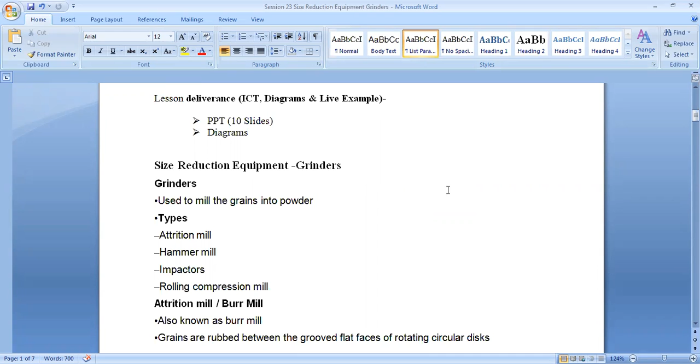Today's topic is the size reduction equipment: grinders. There are three, four types of grinders which are popular in the food industries: attrition mill, hammer mill, impactors, and rolling compression mills. Attrition mill is also known as burr mill, and it acts on the principle of friction.

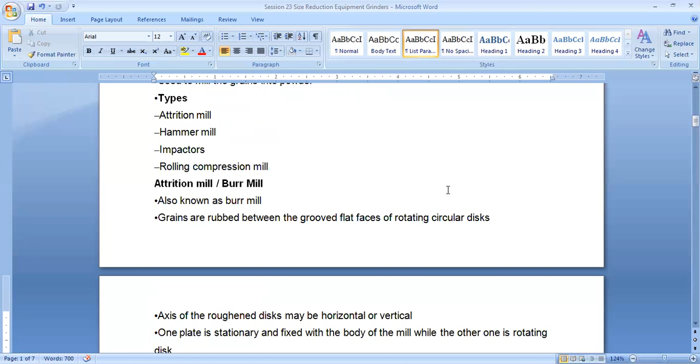And what happens? There are two grooved flat faces of the rotating circular disc, and the food material, especially the grains, is rubbed between these grooved flat faces of the discs, and the material is reduced in size by this action of frictional force.

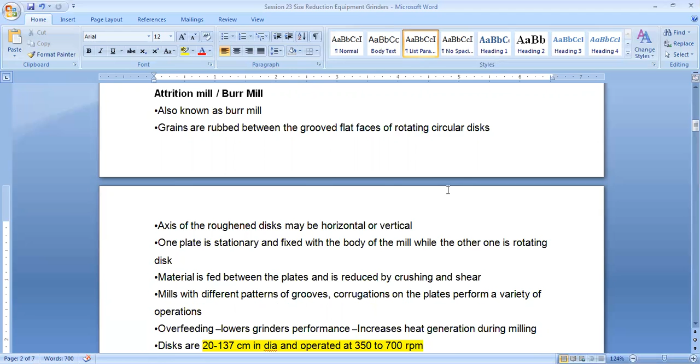And these discs rotate around a horizontal or vertical axis. One is rotating and the other is fixed. The discs are mainly 20 to 137 centimeters in diameter and operate at 350 to 700 rounds per minute.

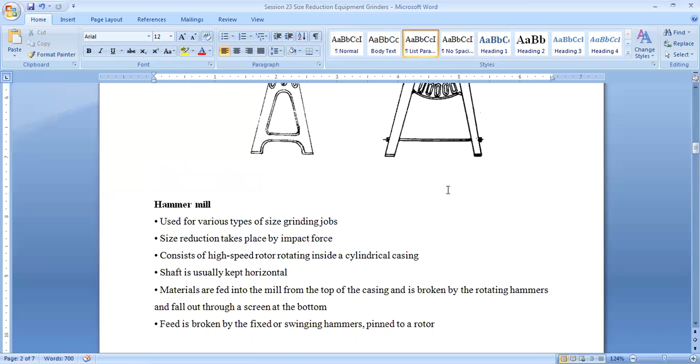Next comes the hammer mill. Hammer mill is a popular mill, and it is used for reducing the size of the food material or the food grains or even the spices into a fine powder. It consists of a high-speed rotor rotating inside a cylindrical casing.

Because of the impact forces, the food material is reduced in size, and that falls on a screen, and from that screen it comes out from the product outlet area. And in that casing, this size reduction, as I told, is taking place by these rotating hammers.

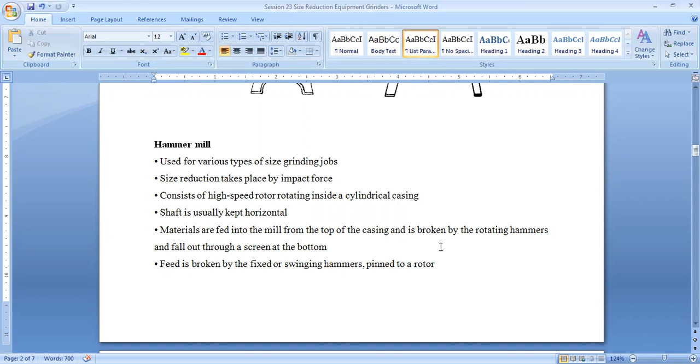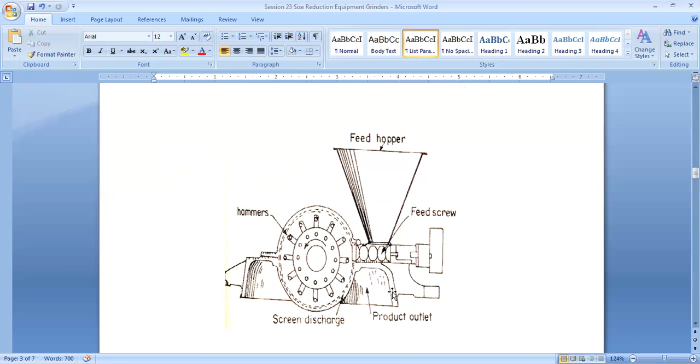And hammers are rotated at 1550 to 4000 rounds per minute. So that's how the size reduction takes place in a hammer mill.

Now comes the ball mill. In a ball mill, what is happening? The balls are there, and those balls give an impact to the food material, and the casing is half filled with the balls. And those balls, because of the centrifugal force, are sticking to the walls of that casing.

And when the ball mill runs, what happens? They drop from the top and fall on the food product, and because of the impact force, the food product reduces in size. So that's how the reduction takes place in a ball mill.

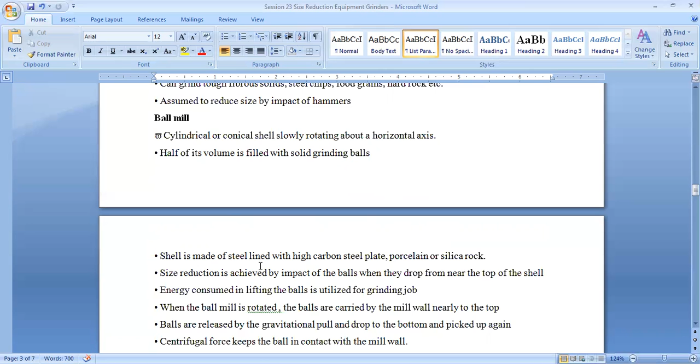Now there is an important aspect, that is critical speed, the rotational speed at which centrifugation occurs. At this speed, no impact occurs and there is no grinding. Operating speed must be less than this critical speed, and it is the speed at which the balls are released from the mill wall, fall on the product, and grinding occurs. It depends on the interaction of gravitational and centrifugal force.

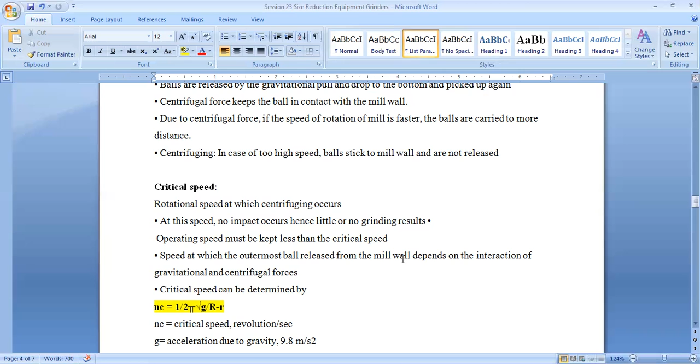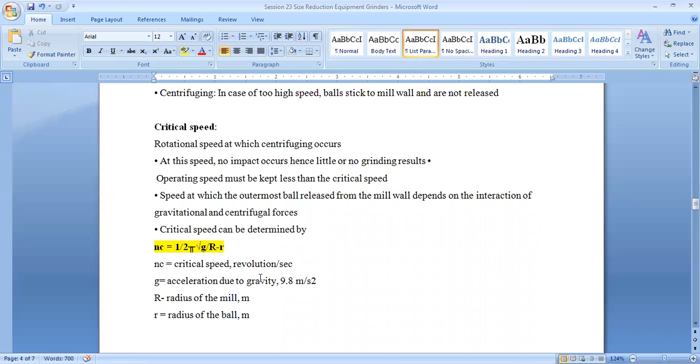I have added a recommended video where you can see the action of the ball mill in place.